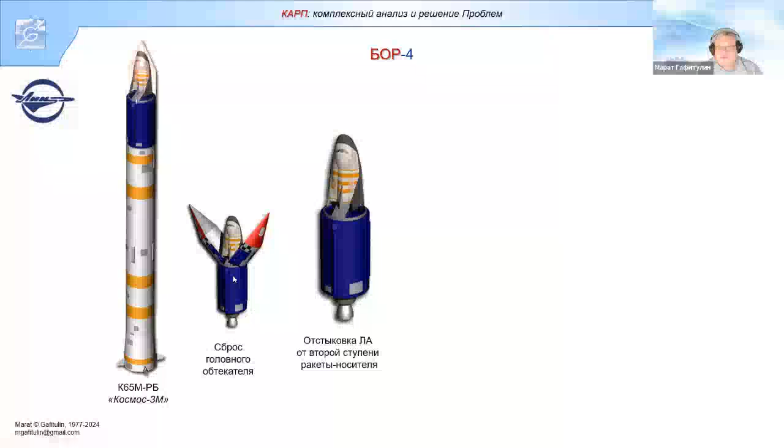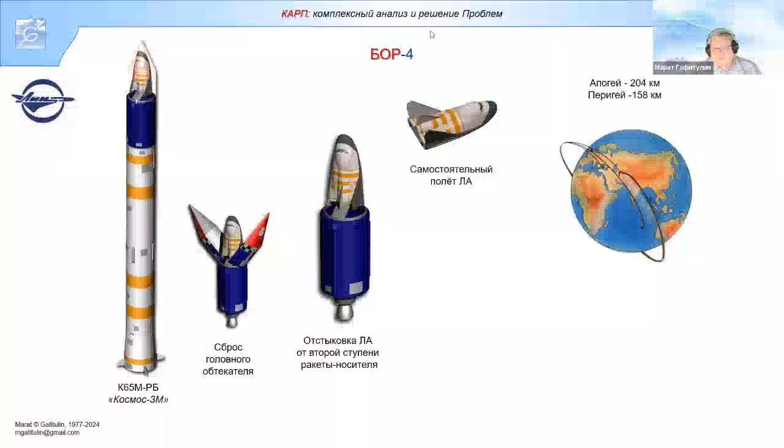It reaches the orbit, and then this top part is released, and it starts its self-sufficient flight beyond the orbit. So this is 204 kilometers apogee and perigee at 158 kilometers. Its task is to then work and then land on water.

Speaking of Kazakhstan, we've seen different... so we have this water and all that. So again, there was this needed geographic scope, Soviet Union and all that, etc. So again, we had these conflicts related to space when I had this training as an engineer in the space industry.

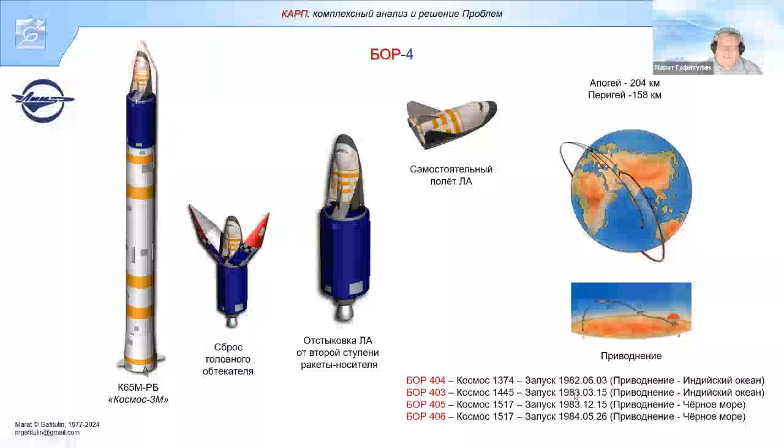So we needed to launch this small spaceship and send it to space. It was able to make 1.5 circles around the Earth. We sent 2 spaceships like that to the Indian Ocean, to the neutral area. And this was top secret. This major project required top secret to be complied with.

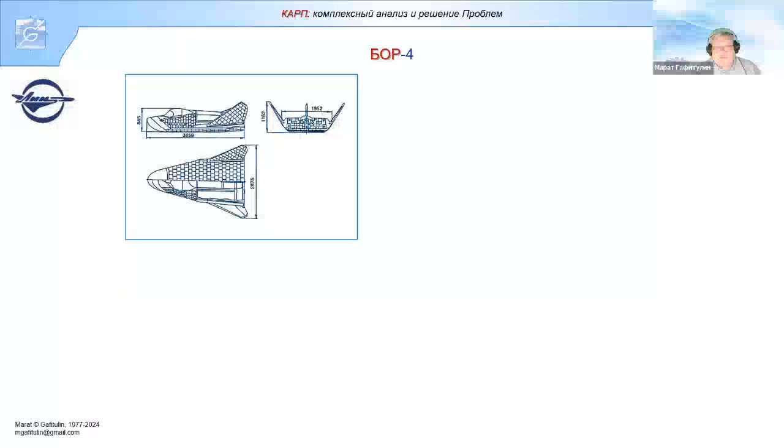So this spaceship is a small one, 4 meters long, and the distance between the wings is almost 2 meters, and its height is almost 120 centimeters. Now this is the structure, so this spaceship should have been able to fly in space itself, and we just wanted to check its components.

So when this spaceship returns back to Earth, it passes through dense layers of the atmosphere, and for that we need to organize thermal insulation on its surface. And we also put those insulations over the rear front console, and we also needed to provide nuclear protection. We also wanted to have it operated automatically to be able to fly in space and then land it.

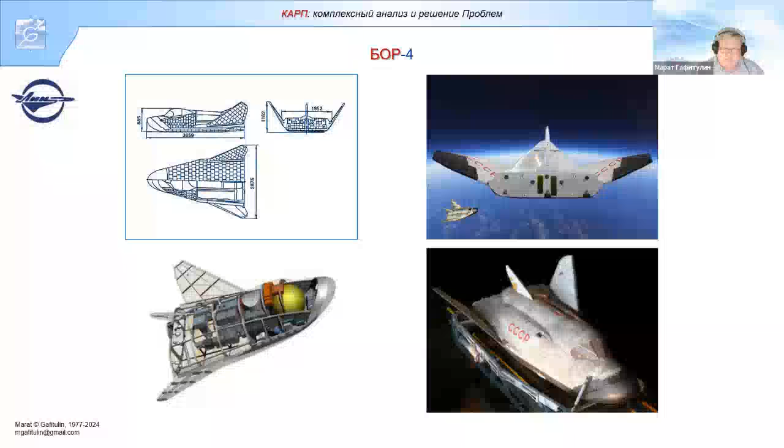So this was the achievement. In 1988, there was the Buran flight, which broke the Guinness record when the first spaceship reached space and then came back without any damage. There is one specific feature of this space vehicle BOR-4: it had engines for maneuvering, needed to keep this trajectory, to avoid spending energy from the batteries inside.

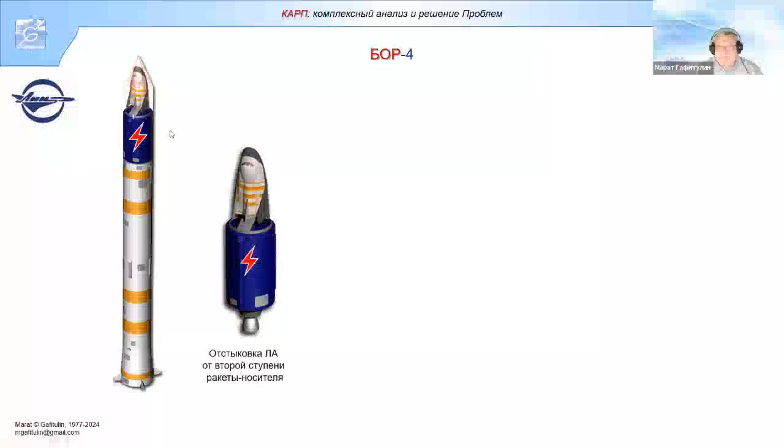So before its disconnection, this energy was delivered from the rocket itself through these two caps which are connected in this area. So we see that this is the connection, which provides power until it is disconnected.

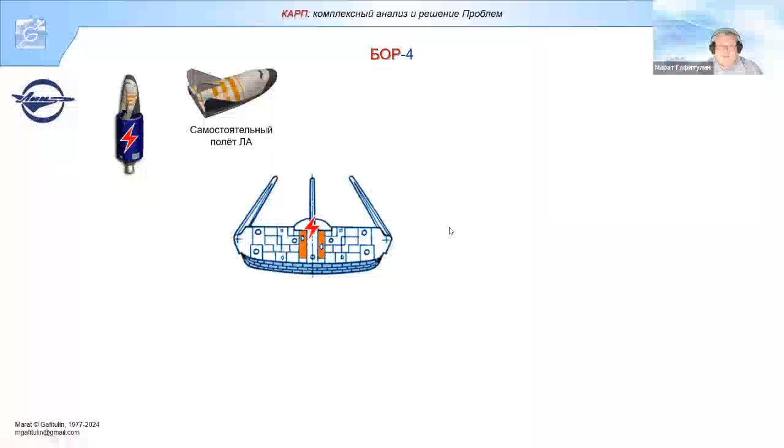So again, there is this second stage, and these thermal insulated caps, they are latched, and all that is a proved connection. So again, there is this BOR unit, which did real flights.

There is this back wall. We have these two caps there. To the left, we have two sockets. To the right, we have two more sockets. But there is this specific feature for these sockets. First of all, they have different forces of joining and disjoining. Here we have 52 kilos, and there we have 75 kilos. So again, 52 kilos, 75 kilos.

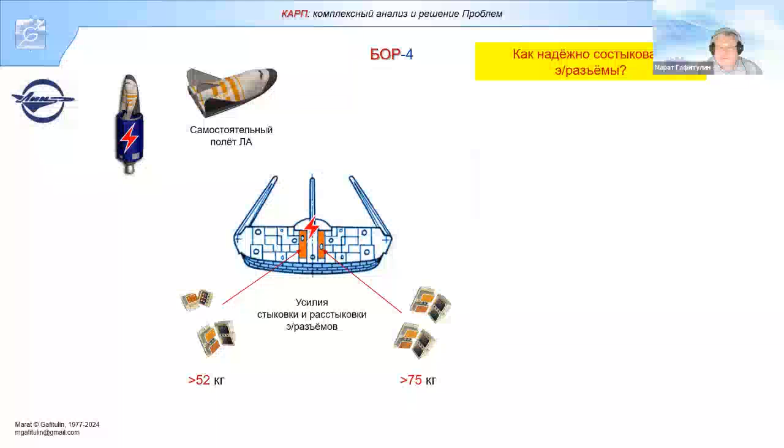And again, there was no power supply. We needed this power supply while the rocket was flying with the launcher. When it needed to switch to a full-fledged flight, it was connected with cables, so those cables were quite tight, and we wanted to either remove these elements or do anything else. If we remove them, there will be tails going out, and this will impact the dynamics of the flight. So again, we wanted after that to possibly keep it inside, but that was not acceptable either. So we really needed to solve this problem on how to disconnect it.

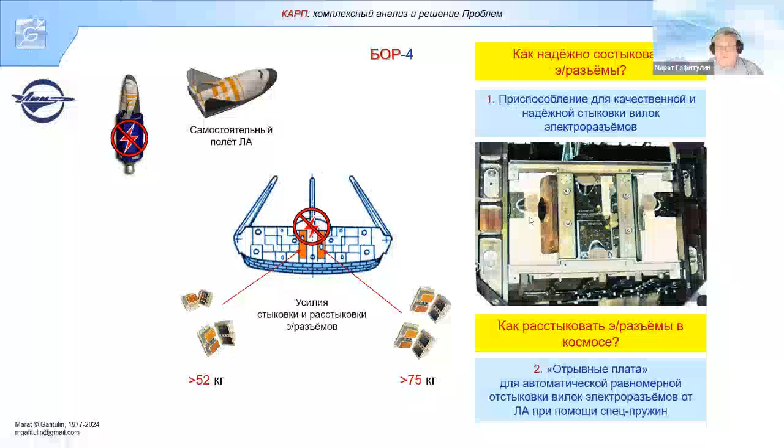So then I had this next task on disconnection, because I was the one to come up with the idea for connection. So I decided to create this automatic system. They wanted to set it up automatically, which should be a simple one to be able to address this in a proper manner. So we created these plates, circuits performing two functions. The first function was that we could connect those sockets together, and then those circuits, so we could use them with a dedicated spring. We have those dedicated springs for each of the sockets so that they would work together to be able to provide this disconnection when pyro bolts are going to be removed.

Then after that we have this military acceptance, so they were like, you did a great job as industrial specialists. What are the guarantees? Where are the guarantees that there will be displacement? There would be a displacement after the pyro bolts trigger, then the vehicle is disjointed from the frame holding the launcher. So again, what about the springs there? Possibly those springs are manufactured in such a way that there will be a displacement, there will be a movement, or there can be some other changes to the structure. So again, they wanted somehow to address this issue, and they spoke of those possible risks.

So they again needed us to define it, and for that we needed a context of space-like conditions, which is weightlessness or gravity absence. This is what we needed, and this could cost millions. So we decided to address this issue to avoid this displacement of the orientation of the flying vehicle. So again, if we had those deviations within the allowed tolerances, we decided to create those additional elements that could tailor those displacements.

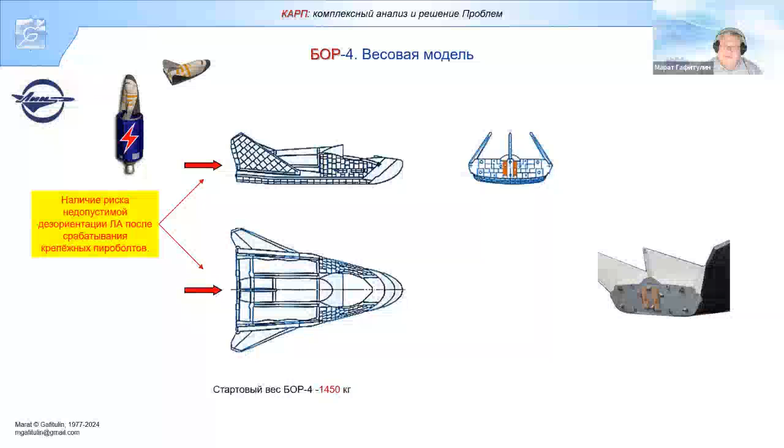So the next part is how we solve this problem. Again, the vehicle itself has a mass of almost 1.5 tons. So almost 10% of its mass is this area. This means that the risks can be very high in case of any pitching or displacement. So we really needed to create such a model that could simulate this finished product. We wanted to create this model of a vehicle with all its characteristics in terms of mass.

So the center of gravity will be the place which will feel the impact of all these changes. There are no data like that, so my wife was responsible for this secret work, working in the secret team. She was in charge of calculating those centers of gravity, those central axis centers of gravity, to be able to ensure proper aerodynamics, again, understanding the spot of a flying vehicle.

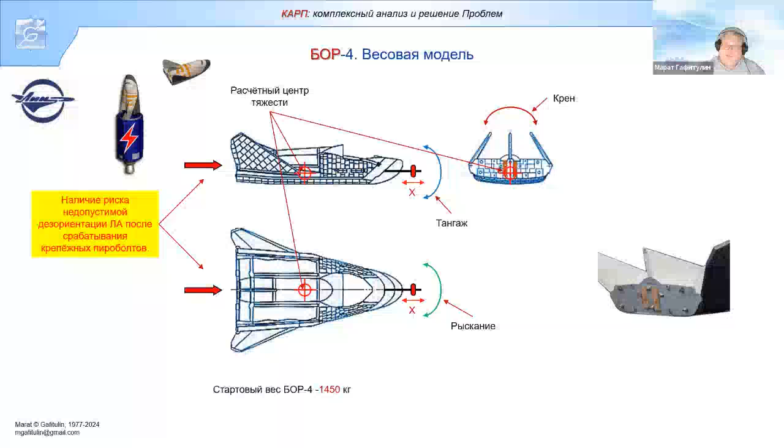So we had this calculated center of gravity, and then we fixed the center of gravity by means of adding those rods. We added those elements to this side, and we also wanted to perform this connection with the mass of the box to be able to calculate additional masses to those 1.5 tons. So this was a very good model, and it was very good that I was capable of solving these problems when it comes to the results of the designer's work.

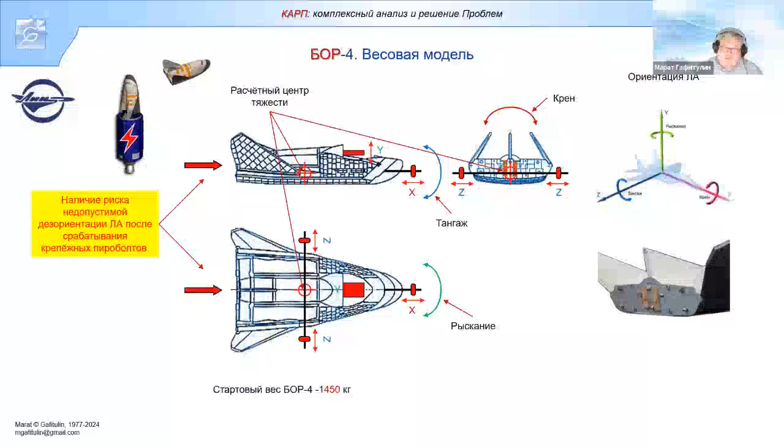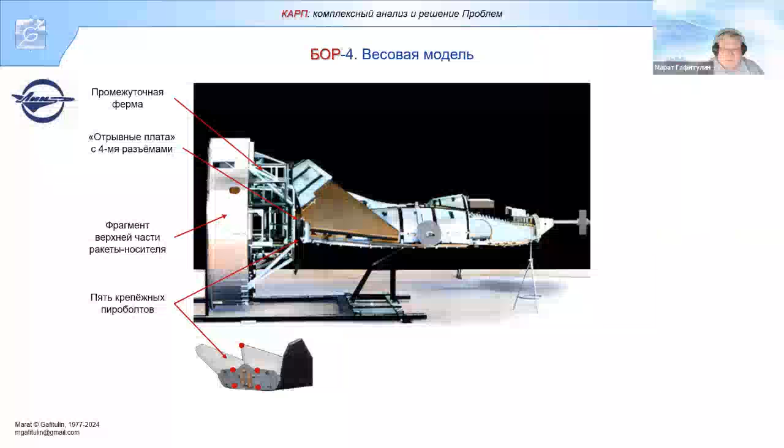This was top secret. I have a photo which is quite an exclusive one, and you will be able to see it. So this is what we had. This is the weight model of BOR-4. You see this top fragment, which is a fragment of the launcher. Here we have this frame through which we needed to insert 4 connectors. And that was a place where we had to distribute these launching devices. And then we added 5 pyro bolts, those 5 connection points to the launcher.

Then we see those elements which ensure proper orientation. This is the calculated gravity center. So this is what we used to perform the calculation. We used those moving elements to be able to calculate all that. These were elements resembling those we have in sport gyms for heavy lifting. We moved them in horizontal directions, and then we added elements from other sides too. So it was very hard to calculate it, and it was even harder to do that physically.

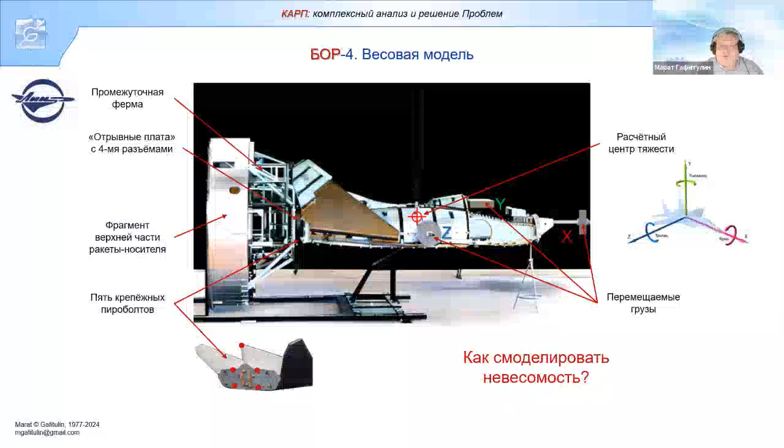So how do we provide gravity-free conditions for such a model, to simulate this gravity-free state? How can it be done? We found a very simple solution. In the center of gravity, we added those belts here. In this hangar, we had 15 meters of height. So we put everything there, and it was hanging on top. It was first stationary. So we pulled it before moving it further.

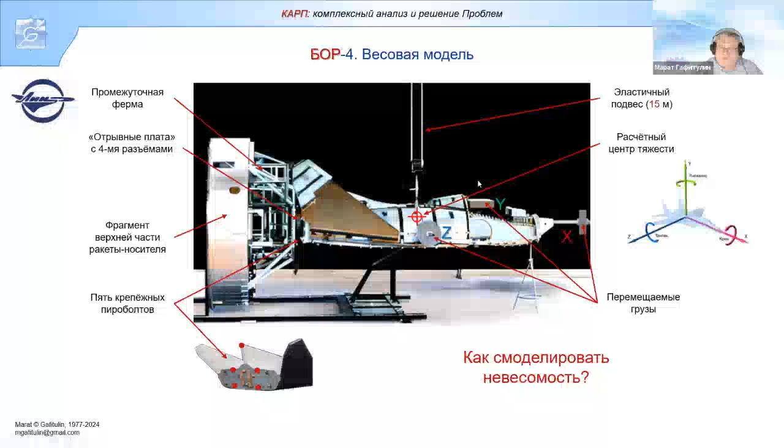So before doing the experiment, it was in this gravity-free condition. We closed the hangar to avoid any airflows inside, to avoid any additional effects on this simulated model. And there is the second picture. Those pyro bolts were triggered, and we added video cameras, cinematic cameras. Then we launched it in the presence of the military.

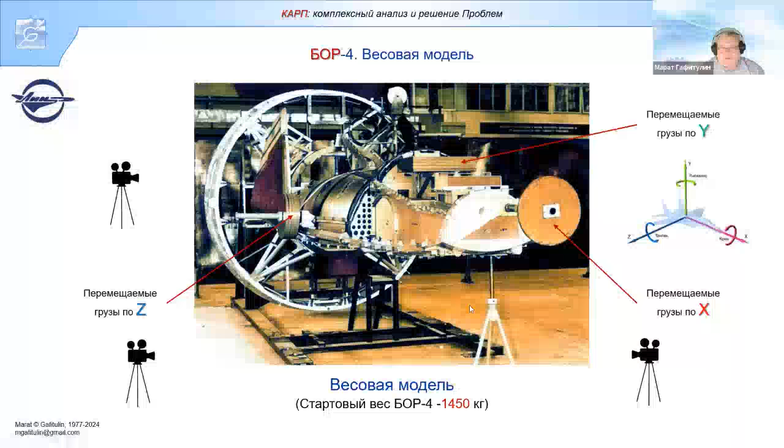It was Sunday. We performed this shooting on Sunday, and everyone was very serious and hoping for a good result, whether there would be displacement or not. When the pyro bolts were actuated, they released the model. We removed those connections, and those springs that I designed pushed the model, and the model moved away without any undermining efforts and impacts. And after that, there was a whistle. So this was a very interesting project in my experience.

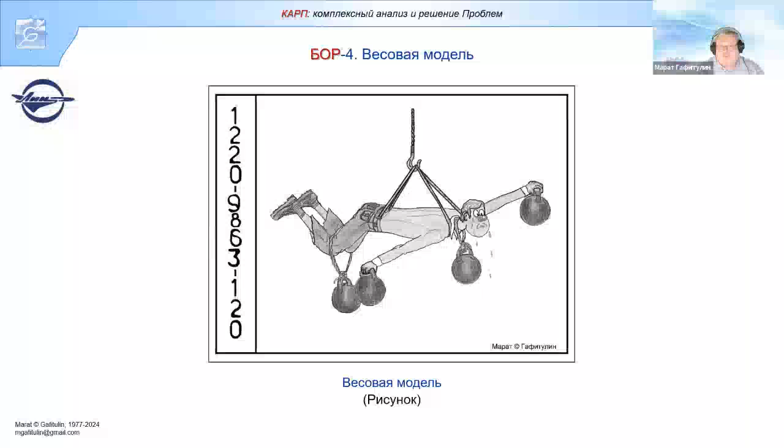Before I had this photo taken, I addressed another issue, which is to overcome this contradiction: whether those photos should be secret or not, to leave an image of what I designed. It does not always work for this kind of work, because your drawings are top secret, and you sometimes do not see the final result after production. When the customer takes it, you design something else. So I try to draw these pictures to represent what I was working on.

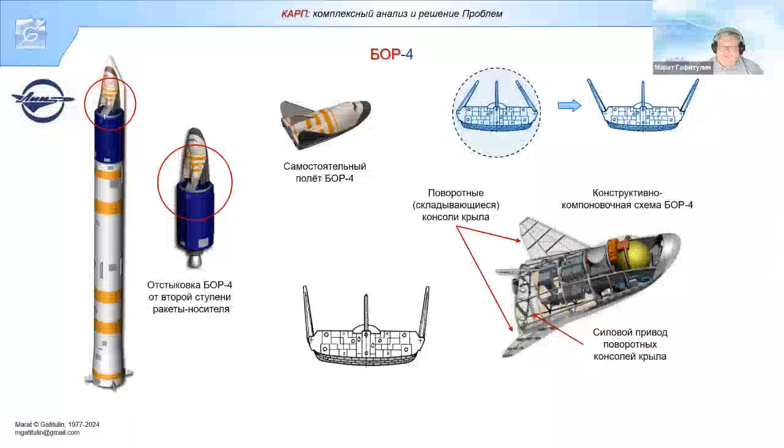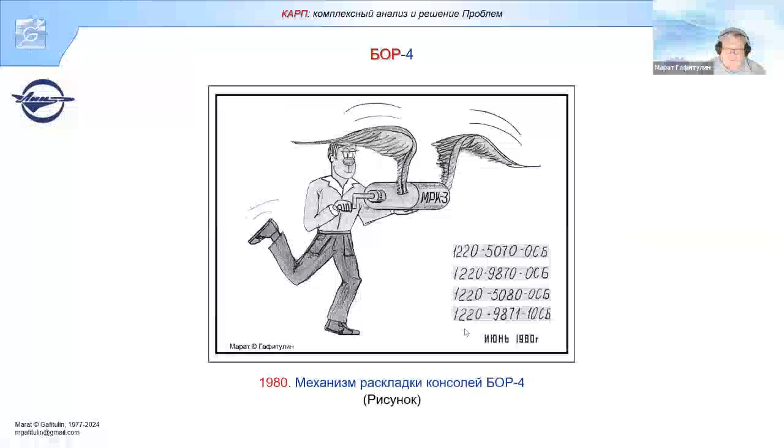So here is the reductor. We had to make a pretty compact reductor, and finally everything was finalized. And colleagues, I would like to tell you that those photos which you see are all from the web, from open source. They're not drawn by me. I found them, but they're related to those developments which I made. And of course, I made this very picture, a pretty humorous thing. So this reductor was very cute. And you can see it's June of 1980.

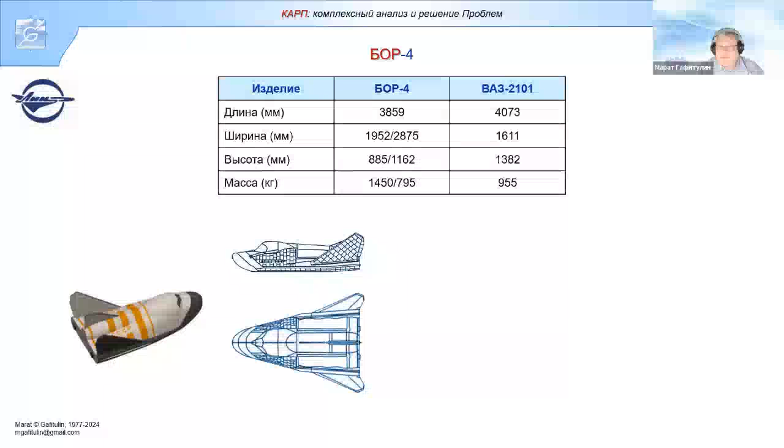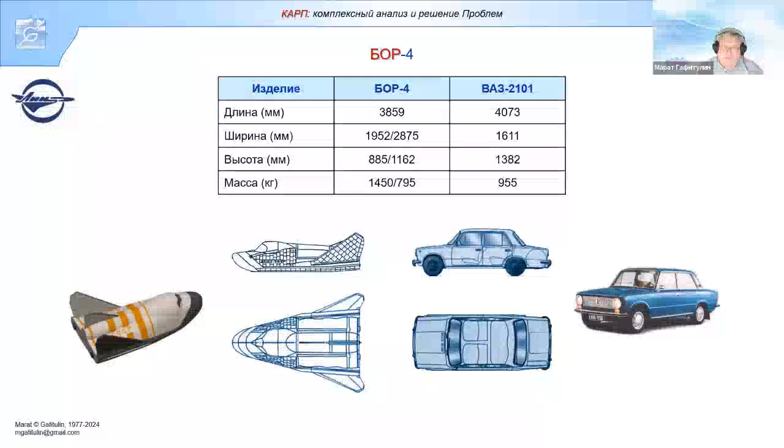Also, there is another interesting thing. This is with double intention: first, psychological, and the second one to resolve some issues. So at first, I will show you the comparison. You can see this BOR-4; the size is the same as the usual automobile. For example, a very famous car was the 2101 in 1980. They're very similar in size, in parameters, and of course the weight. A flying object is much bigger, especially when it is launching, so the weight is like 1500 kilos.

And this was the task of the designers, the ideologists of this project: the earth is pretty large, and you have to come to the surface of the water. Everything was in secret, and we had to find out where to take off and then to land in the Indian Ocean. So then we could lose the model; not only telemetric parameters are important, but the most important is to land it on water, to find it, to catch it from there, and in the end it's not 1500 kilos, but 800 kilos, a pretty heavy one.

So it should have been on the surface of water, but because it was in neutral waters, whoever would be the first to detect it, it would be his. So everything was in secret. Australians and Americans were very much concerned about this splashing down. They were anxious because the control center didn't know about that, and nobody would like to take responsibility for weather conditions of the splashdown, and calculations for flying objects with such sizes and shapes were not very precise.

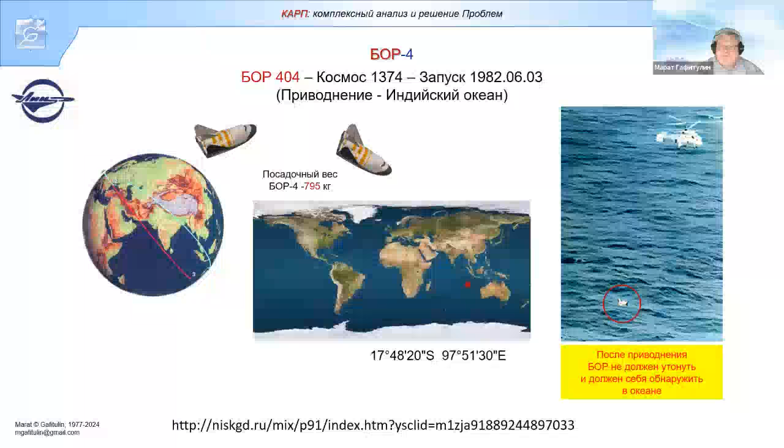And it is detected not only by Soviet specialists, but also by international specialists who survey this territory. So how should it be done so that the floating capability would be really high? We were looking at the resources. It was not my idea; it was resolved by the guys. There is a special section for the braking parachute.

It was coming through the dense layers of atmosphere, and then at 4 kilometers the lid in the upper part was separated and the braking parachute engaged. After the parachute was no longer needed, it was kicked off, so this section was empty, and after splashdown the water would fill up this section, so the floating capability would be worsened.

So finally, we decided that as soon as this section becomes empty after engaging the braking parachute, we had to put an inflated elastic shell in there.

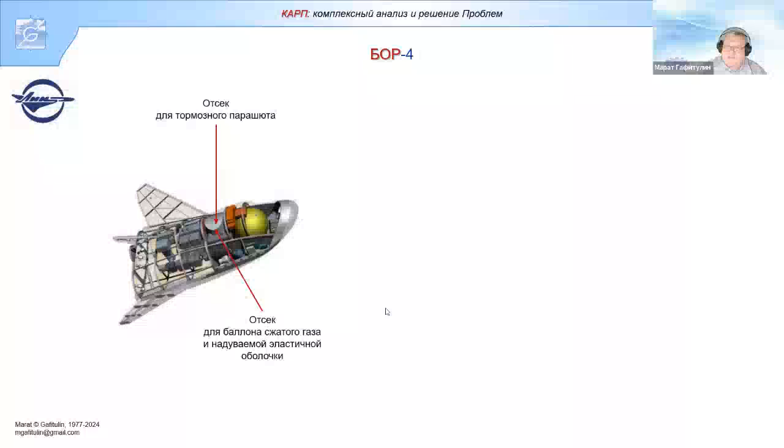So right away after it is inflated, it will create some additional volume and the density will be correct. So said and done, the concept was really good, everything was well.

And because of the very construction, because we had this construction, design, production, and our guys were doing all the phases. But nobody did that before. So we had to design it, we had to make a project for it, and who would do that?

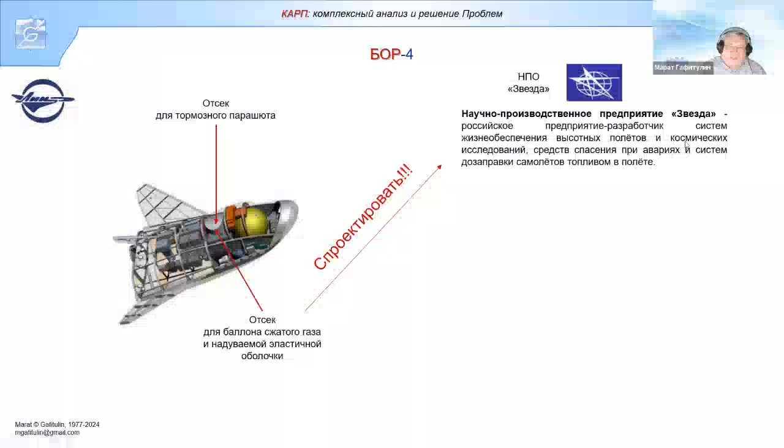So we addressed this very interesting company, Scientific Production Enterprise STAR, and the main target mission of that company is rescue means. Then they diversified. Besides that, they were filling up with gas, and they were even able to make a harvesting combine, but mainly they were dealing with rescue devices, and I had some experience of working with this company for rescuing our pilots of fighting aircraft.

In some emergency situation, their chair was kicked out, shot out from the airplane, and it should be catapulted to the water, and out of the water, with the special light, this pilot should be appearing.

So that company was dealing with all the space special suits. All the compensating costumes of the pilots were designed there. All those special armchairs of the aircraft, and all those emergency inflated devices for landing, all those ladders were inflated, you see, and that's why they had the special calculation for sealing it, for designing, and because the shell should have been elastic, we talked to them.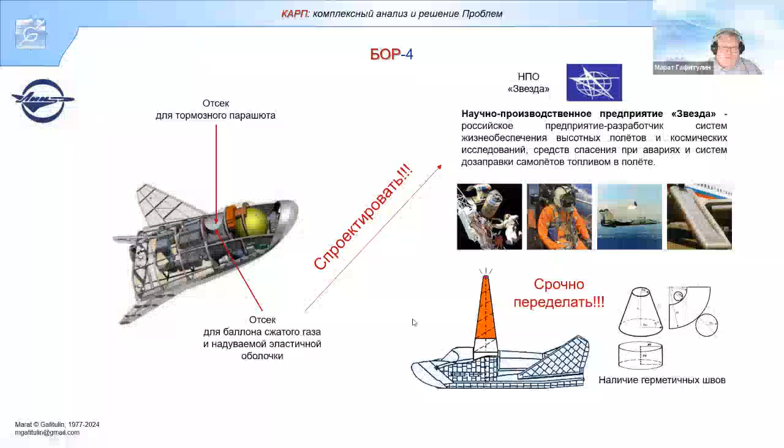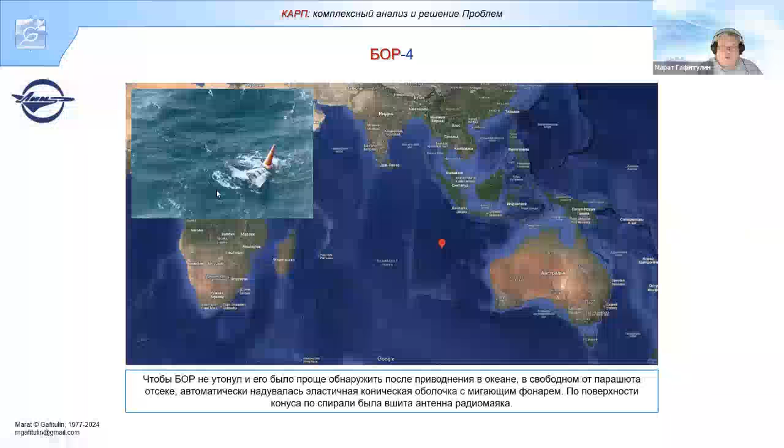So very soon this cosmonaut would fly, but it was in 1980. It was a Vietnamese astronaut who was flying to space. So this is the GPS coordinate of that very landing, splashing down.

So here you can see the GIF picture, like a little video. This is the aircraft of the Australian military forces, which was flying over that territory. And those pictures which were made, you see all those

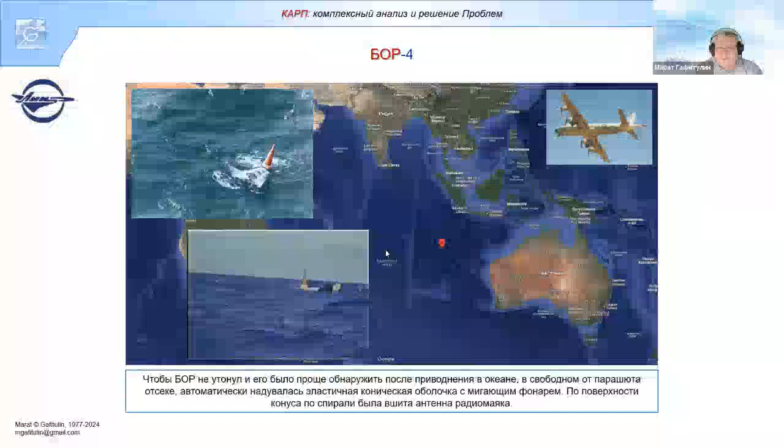planes were there all the way, and we had to rescue urgently, swiftly, because the calculation of our landing on water had like 200 kilometers plus minus error. That's why we very urgently had to move it to the neutral zone. And after that, here you can see those Orion airplanes.

And our guys are very good at this, because they put a special key in it, which could be opened only by our specialists. Otherwise, if they don't know how to use it and they try to open it, an automatic explosion would happen, with everything that was inside of it. So it was like a naval mine, like a bomb inside.

So at first you had to make it safe against explosion, and after that, with a special stage of work, you had to bring it to the final stage. So this very cone was sticking out, and of course we had to increase floatability.

And also, you see on the previous slide, there was a special component with a light signal. So here are the pictures from the internet. It is made by the Australian military forces, but I changed it a bit and put some colors so that it would be understandable. And so,

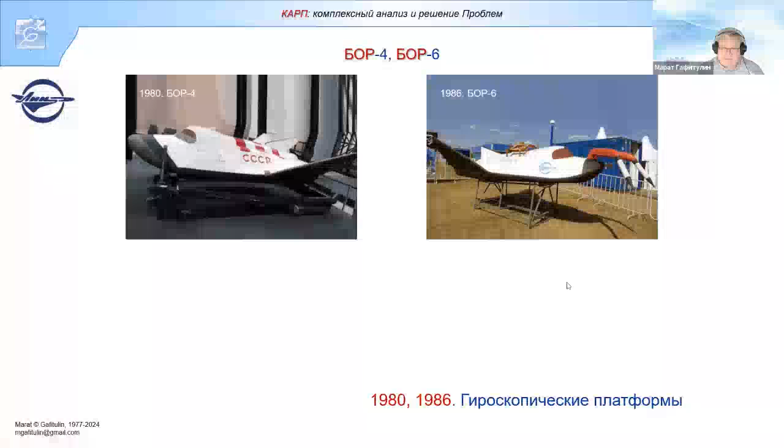Gyroscopes, so that the stabilization of platforms would be happening, and then internal stabilization with another control. And then this platform was another addition. So it was BOR-6 of the Soviet Union. Because the money was finished at the Soviet Union program, that's why it was finished like that. So I drew such a picture.

Thank you very much, Marat. It is very insightful and interesting. I think you still have a lot to tell us. Yes, when I drafted this list, I had over 40 projects within 12.5 years. And it's very interesting what kind of them could be represented as training problems. Yes, we could think about it. Now, colleagues, do we have any questions? We really are delayed quite a bit, over 1 hour.